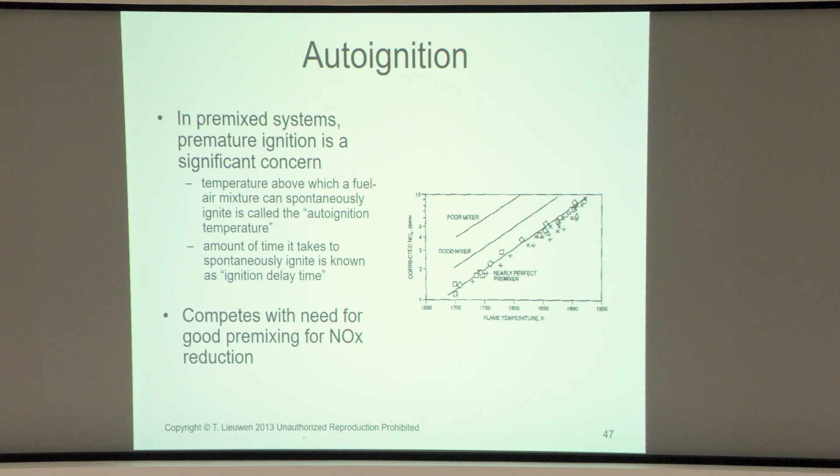All right, let's keep going here, just trying to wrap up this outlook discussion. I want to say a couple of quick things about autoignition, because that's also such an important driver for where combustion R&D problems meet the real world. Autoignition is just such an interesting challenge.

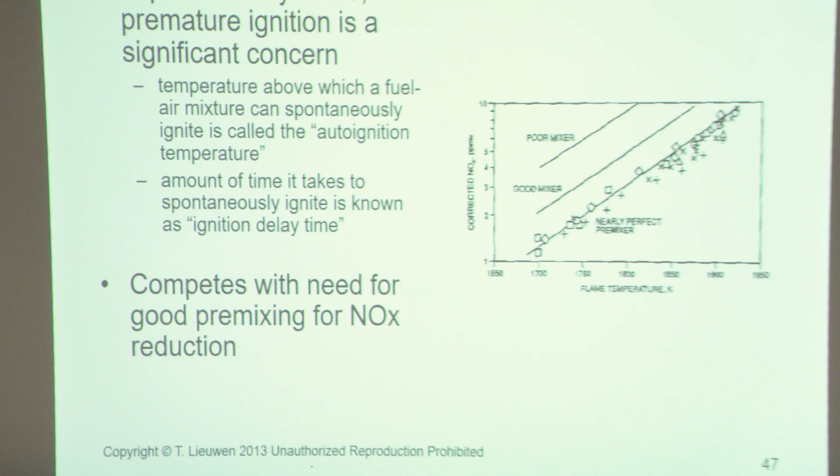If you're going to run premixed, premature ignition is a significant concern. As you can see from this plot I showed you earlier, if you want to drive down NOx, you want higher mixing. Better mixing means longer residence time, which makes systems more prone to autoignition. So you're always trying to trade off autoignition and NOx, particularly in higher pressure ratio machines.

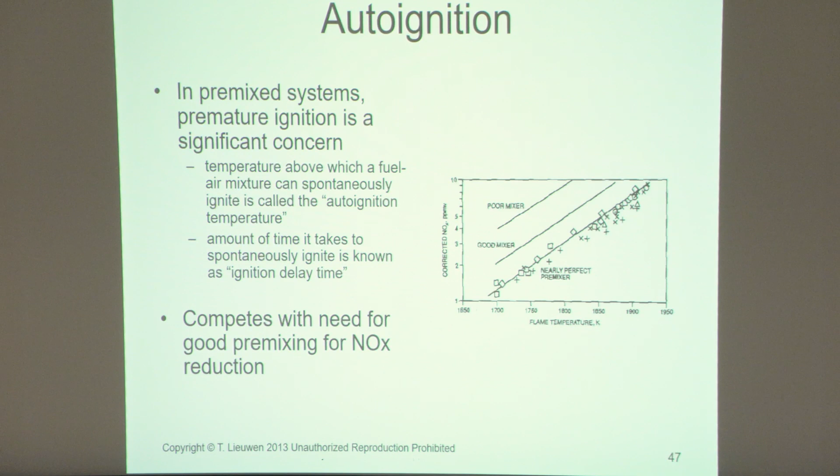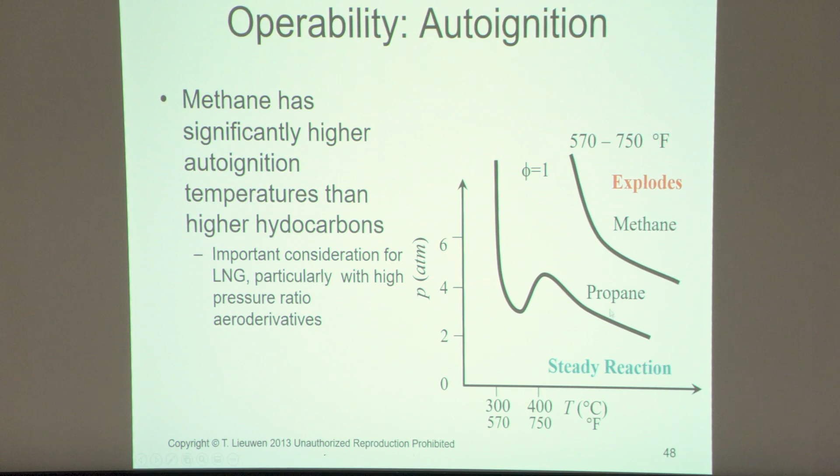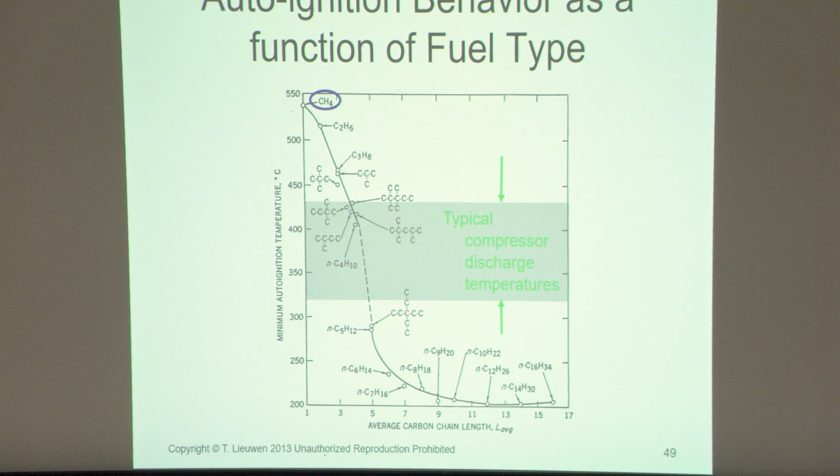This plot just further expands on this. This is a whole bunch of fuels, and this is sort of an ignition temperature, I think at 1 atmosphere - I can't remember. This is autoignition temperatures as a function of average carbon chain length. So the very top left is CH4, and then C2H6, C3H8.

You see that autoignition temperature dropping, and then you start looking at normal octane, normal decane, or normal dodecane. Temperatures are dropping, so it's getting easier and easier to ignite.

This is why for liquid-fueled systems - and obviously you're becoming a liquid as you move to the right as well - autoignition is such a hard problem. What you'd really like to do is what we call lean, pre-mixed, pre-vaporized: take your liquid fuel, vaporize it, and then pre-mix it. That takes time - more time than a gas because you've got to pre-vaporize it - but you actually have less time because the fuel auto-ignites so easily.

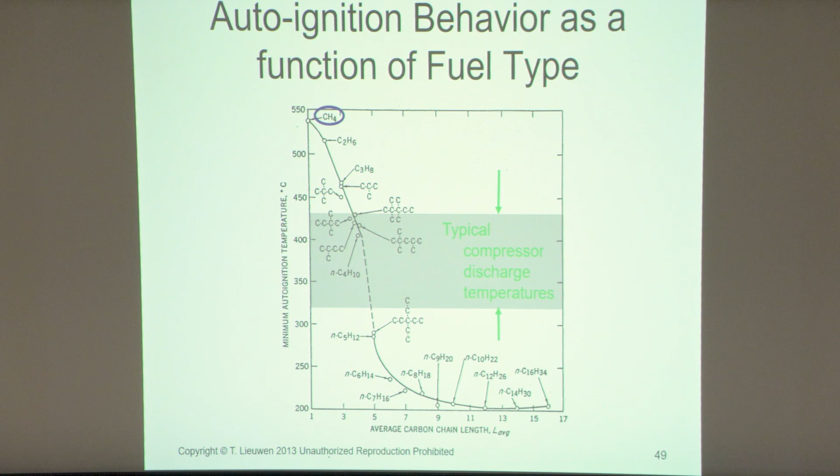This is why, if you look out there today, people are trying to get in that direction - like GE, some of General Electric's aerospace engines are trying to push in this direction - but those autoignition temperatures are just really low, and the temperatures and pressures in an aircraft engine are just so high.

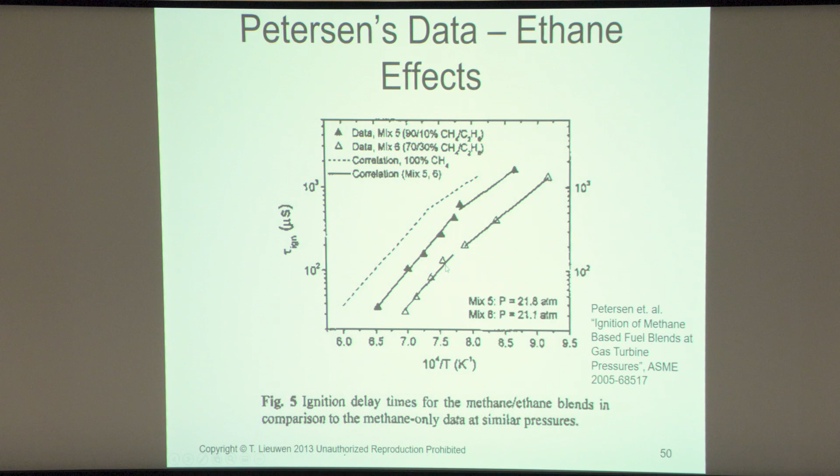Just to give you a ballpark, a conventional mixing time we might use would be a couple milliseconds to give it enough mixing. This would be pure methane, if you have 10% ethane, if you have 30% ethane. So this starts to become a real issue as you start blending stuff into your gas.

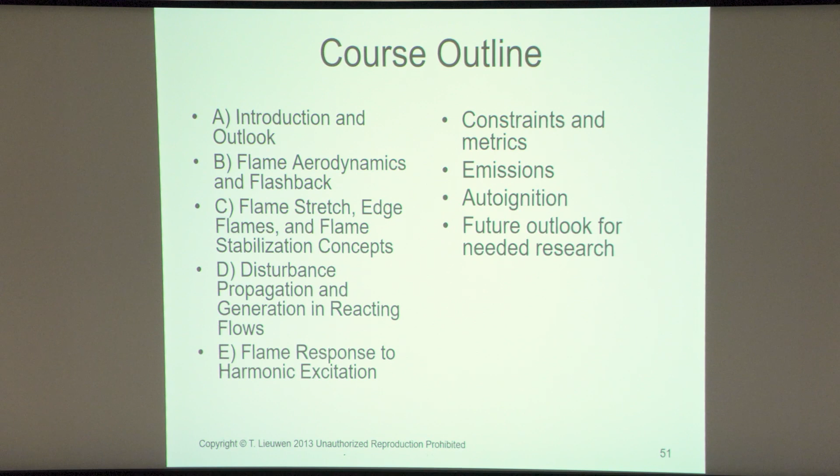So what I want to do now is shift a bit from the initial plan. I want to talk a little about where the world is going, what are some of our prospects, before I do a deep dive. Hope that's okay, because I feel like it might be useful context as you think about your future in combustion research.

What are combustion applications? Well, one big combustion application is natural fires. I'm not going to talk about natural fires, but that's really interesting stuff.

As you know, look at the air quality. I have two daughters living in the state of Michigan right now, and air quality from forest fires...

Canada. Another one is commercial space, that's really cool. What's happening in commercial space is really interesting. Everyone graduating from my lab now is going to work for commercial space companies in Seattle or California or Denver or Atlanta. Actually, we have a couple companies. Military applications, that's another one.

But I'm primarily going to talk here about civilian type, either power or propulsion type applications. And really, the 900-pound gorilla in the room is decarbonization, right? What does decarbonization mean, and what are those combustion challenges?

As I mentioned before, CO2 emissions are set by fuel, they're set by the cycle choice. That generally sets the overall conditions for the combustor. So what that means is increasingly we're going to go to higher pressures because efficiency is really important, because the higher efficiency, the lower the cost of the combustion-based solution. It means we're going to be looking at EGR type applications.

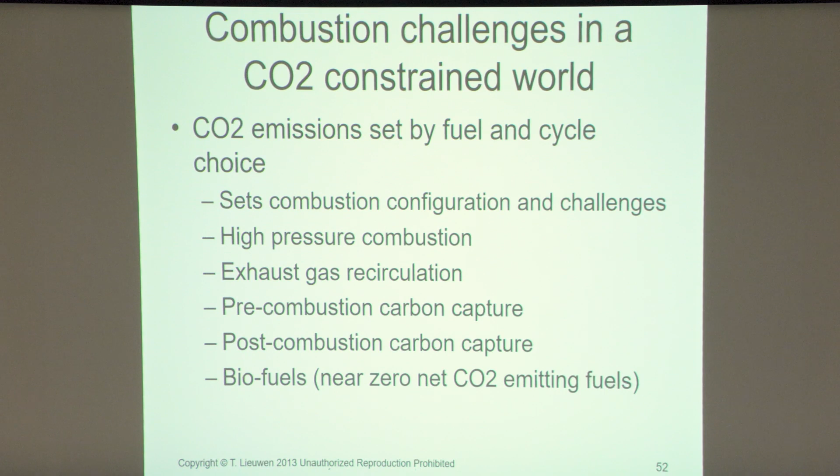If you want to do post-combustion carbon capture, you want a stream that's preferably composed primarily of carbon dioxide and water, you don't want all that nitrogen to have to deal with. And so that means there's a lot of people looking at oxy-combustion systems.

I don't know how many of you are familiar with what's called the Allam cycle. Okay, go take a look at it. It's kind of interesting, there's a lot of competing technologies, but the Allam cycle is basically trying to address the question of: let's suppose you wanted to design a power plant that was optimized from the beginning for carbon capture, rather than trying to bolt the carbon capture unit onto the back. How might one do that?

Really what it comes down to is you want to burn oxy-fuel, so you don't want all that nitrogen floating around. And then you start integrating the air separation, the oxygen generation system, with the power plant, with the CO2 stream. But what's really interesting about oxy-combustion is it's a little bit like rockets, except you're burning a lot more fuel.

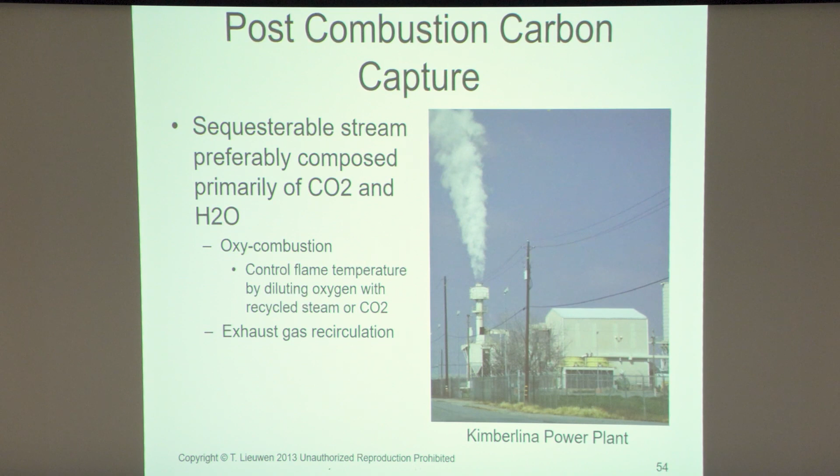Just like we only burn fuel lean in air-breathing systems because you'd never waste fuel, right? You never burn fuel rich. Only rockets burn fuel rich. But you don't want to waste fuel. In the same way, if you're paying for the oxygen, you don't want to waste oxygen. Which means you're going to want to burn dead smack, dead nuts, phi equals 1, and so forth.

And lots of really interesting combustion problems pop up when you start burning at phi equals 1, because phi equals 1 is actually kind of a crazy place to burn. If you think about it, if you're fuel lean, you've got lots of extra air floating around, and the fuel molecules just have to find a friend. If you're fuel rich, it's the other way around. If phi equals 1, there's only one, it's 1 for 1, right? You don't have anybody extra.

And so combustion chemistry gets a little bit crazy right around phi equals 1. Also, when we all learn combustion, we're used to thinking about equivalence ratio tendencies, which tend to be driven by temperature sensitivity. As you change equivalence ratio, you change temperature. So we think, oh, lean flames are colder, stoichiometric flames are hotter. Well, now when you're burning with these oxy systems, you're actually going to be decoupling stoichiometry from temperature. And it turns out a lot of things flip.

So for example, if I were to tell you I'm going to burn oxy systems and I want to sweep phi, and the way you sweep phi at constant temperature is you adjust the diluent ratio. And I wanted to plot flame speed as a function of equivalence ratio for an O2-CO2-methane system, just as an example.

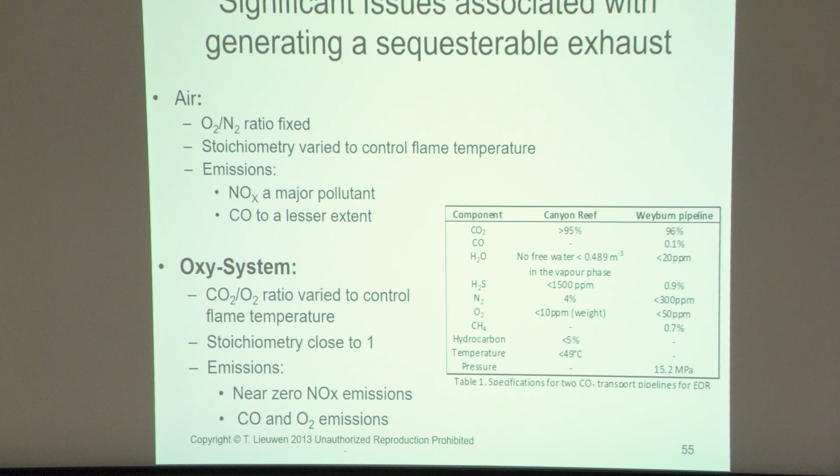And then other interesting things happen: if you have to generate a combustion exhaust stream that is sequestrable, or that you can put in a pipeline, you start changing your definition of pollutants. As an example here, I have a CO2 pipeline spec for EOR.

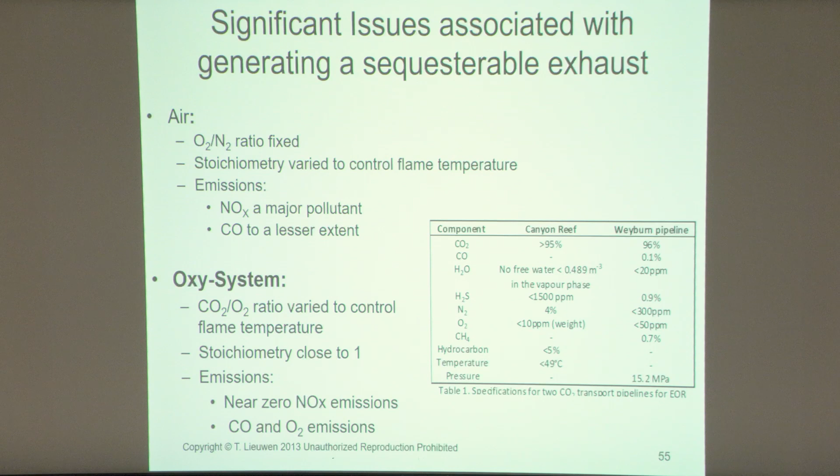EOR means enhanced oil recovery. This is where they actually built a carbon dioxide pipeline and use it to pump CO2 to get more oil out of the ground. Similar issues arise if you wanted to pump it underground.

And you'll notice the spec. Notice here, the Weyburn pipeline has a spec on CO. The reason it has a spec on CO is because the carbon monoxide can react with the metals in the pipe. Notice there's also a spec on oxygen.

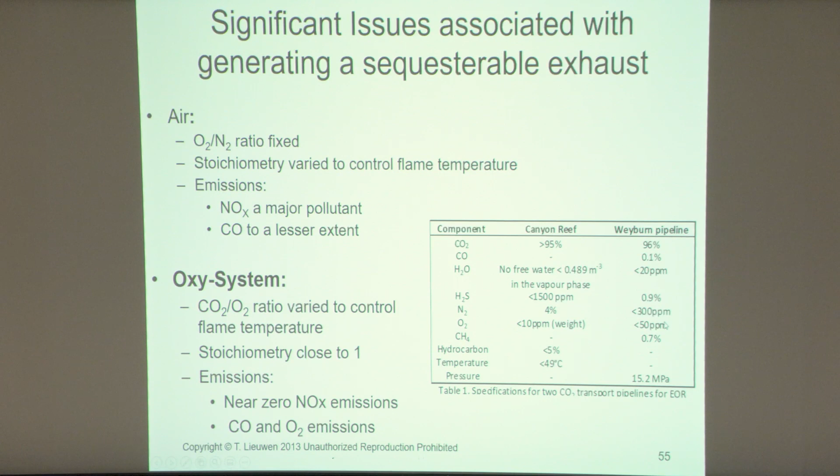So now oxygen, whether it's 10 ppm or 50 ppm, is kind of a 'pollutant' if you're putting oxygen into a reservoir or a pipe. Well, it's really hard to keep both CO and oxygen down at phi equals 1.

So the bottom line is: keep your head up as you're doing basic combustion science. Who would have ever thought about this combustion problem — how do I make a combustor that has almost no oxygen emissions, emitting 10 ppm or less O2? So pay attention to where technology is going, where policy is going, and that will suggest really interesting combustion problems you could sit in your lab and never think about.

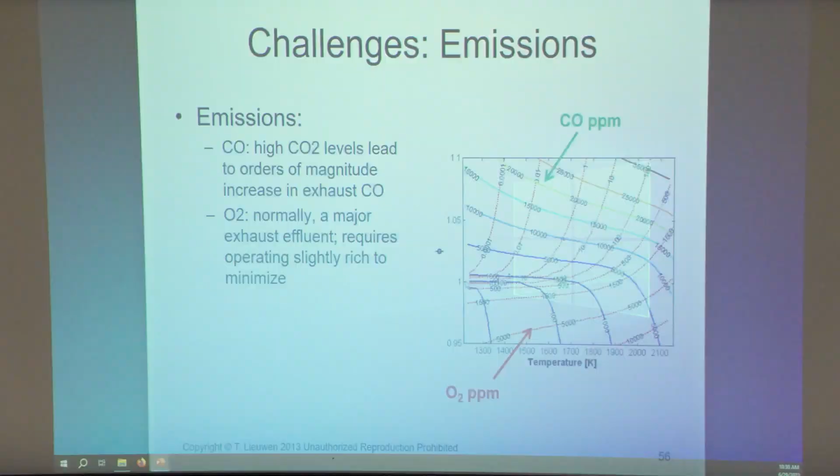All right, so I think I'm going to go off script now. Is Mike here? Hope he's okay with that.

Like I said, I'm going to actually be giving this talk. So what I just did was blast through some of the R&D problems, because I have this Gordon conference where I'll be giving a more complete discussion on that. So here, you're all going to be my guinea pigs.

For this sort of 50,000-foot view: the world's changing. Decarbonization, in the world of energy, the world of civil aviation and transport — decarbonization is totally driving the policy and funding landscape, and what's the role of combustion in this rapidly evolving sector? And then, what's driving combustion R&D in this new world?

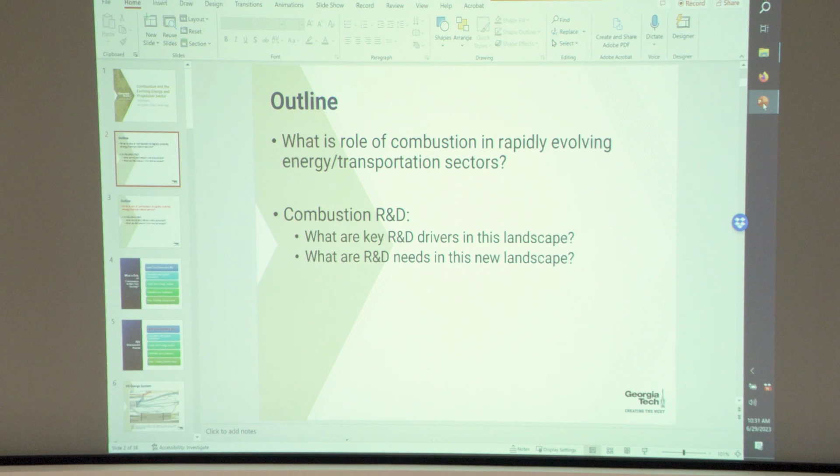So there will be a little bit of duplication here because I've made some references to it already, but I want to tackle this in a more systematic way. And then, what are the R&D needs in this new landscape?

Let's start by talking about combustion R&D. To have combustion R&D, you need to get your society to fund it, unless you're independently wealthy. You need some macro driver.

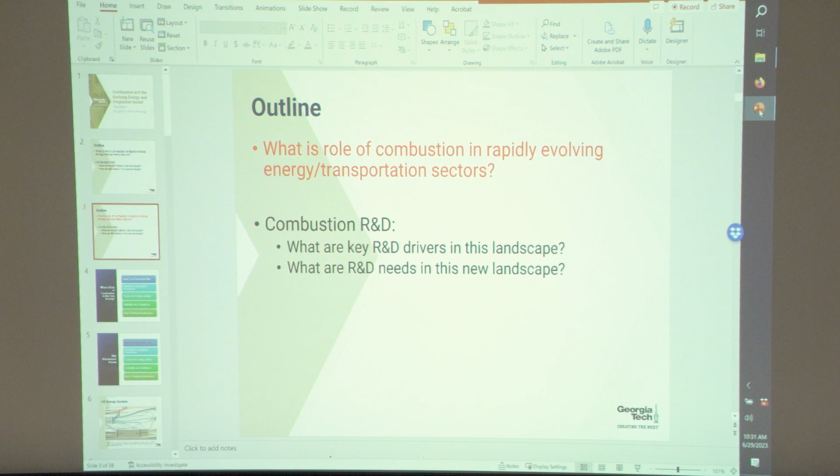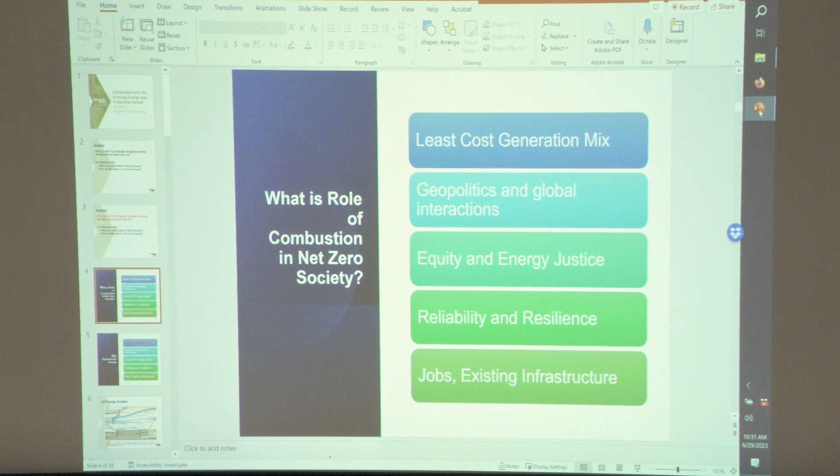So what is the role of combustion R&D? It's a complicated question. You've got to keep your head up in this new world and think about what's driving these conversations. These are the boxes of things driving combustion conversations today, and I'll briefly talk about each one. I think the first one is probably the one we're most comfortable with as engineers.

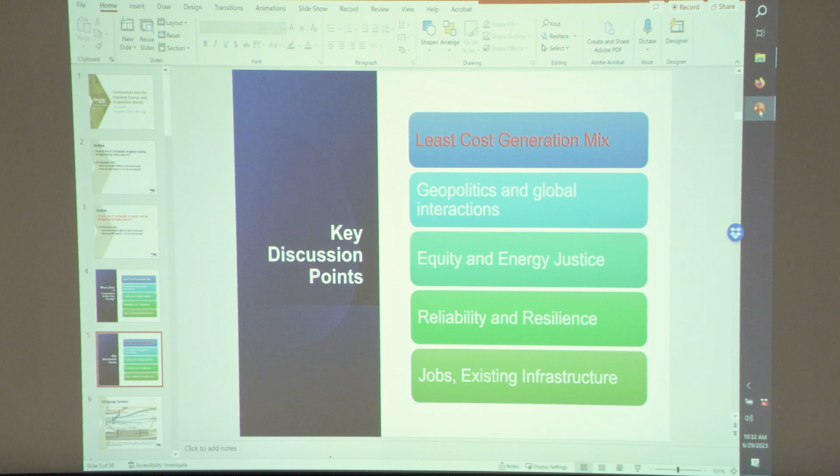That's the question of: let's assume we want to get to net zero CO2. What's the least cost way to do that? Let's imagine a society where we're starting - we can't blow the world up and start from zero, we have to start from what we have today. So how do we get from point A to point B in a least cost way? I'll spend some time talking about that.

Actually, let's go there first. We can start by just saying, what does the world look like today? I need to make this macro. You've all seen these Sankey diagrams.

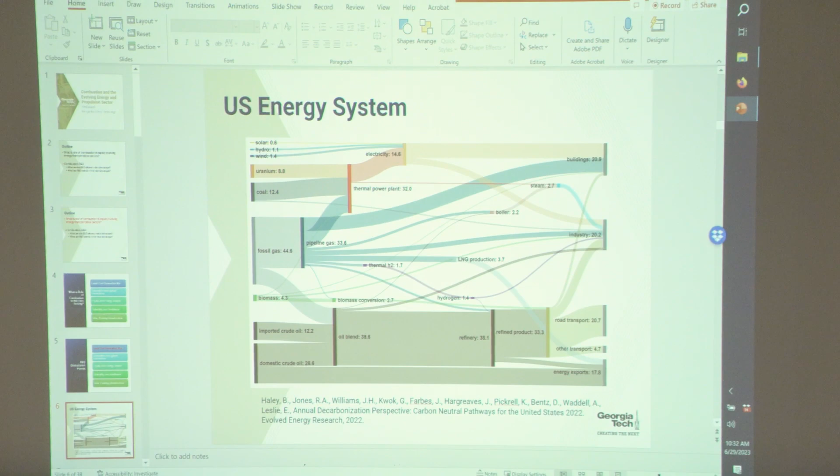What's on the left is our fuel sources, our energy sources today, and you can see fossil gas is a really, really big one. You see crude oil, coal, uranium, and wind, hydro, solar - tiny small boxes.

Over on the right-hand side, you see where that energy is being used. So the left is the sources, the right is the users of energy. You see buildings - buildings today are about 40% of electrical load, of overall energy load. You see industry - agriculture, metals making, aluminum, things like that. And on the bottom, the biggest CO2 emitter today in the United States is road transport - cars and trucks, things like that.

In the middle is: how do you go from where the energy is sourced to where it's consumed? You can think about this as the plumbing and wiring. Just like in your house - or your parents' house - you've got power lines outside and all the things that utilize that electric power inside, so you've got all this wiring. And you've got plumbing - a source of water outside. So how's it all connected? What's in the middle shows the plumbing and wiring.

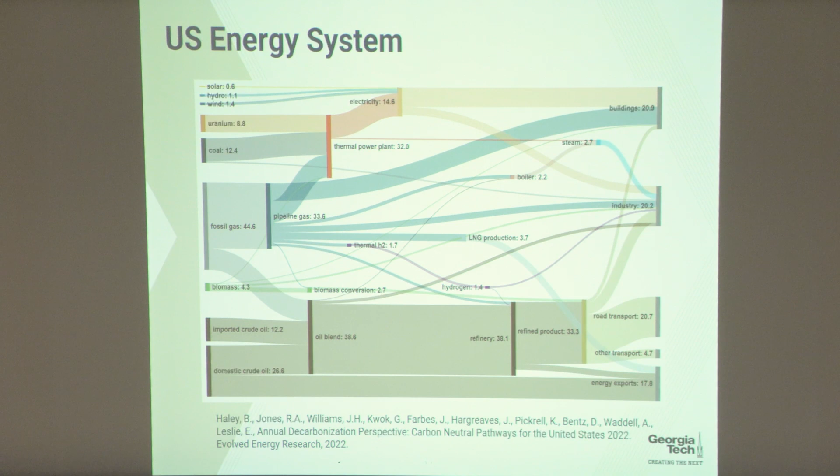One thing that pops up in the middle is electricity. Electricity is what we call an energy carrier - it's not a source of energy, but it's a very useful way of transporting energy from the source to the user. But you also see that a lot of these things direct-connect all the way from, particularly if it's a fuel, the left to the right. So a nice way to deconstruct that system is to say there's really three things going on in that picture.

We've got these energy sources on the left, which are largely non-dispatchable renewables, nuclear, and fossil. On the right we've got these users - basically industry, transportation, and buildings. But don't forget in the middle there's a lot going on - we've got all these ways of storing and carrying energy. Someone already referred to the electricity storage issue, but don't underestimate how important that is.

Think about how dependent we are today on electricity, which is basically a just-in-time business. Just think, if I dim those lights, there's actually a power plant the grid is adjusting - a power plant that's adjusting its power output. So within a fraction of a second, the supply and demand of electricity are balancing each other. Basically what happens is the grid frequency changes just a little bit, and that acts as a signal to the power producing sources. Think about what other major commodity our society is based on that's just-in-time. Like, I don't know, bread.

Bread comes from wheat. Imagine a world where your consumption of wheat was exactly balanced by the production of wheat.

Take strawberries, or any commodity, or cotton for your shirt. We're used to a world where things can get stored and made over here. But electricity, we don't really store it, although we're trying to ramp that up. And it's really hard to move. Ukraine makes a lot of grain, and it's shipped all over the world, or the US makes a lot of grain, or cotton's grown in Australia. So we have these global ecosystems.

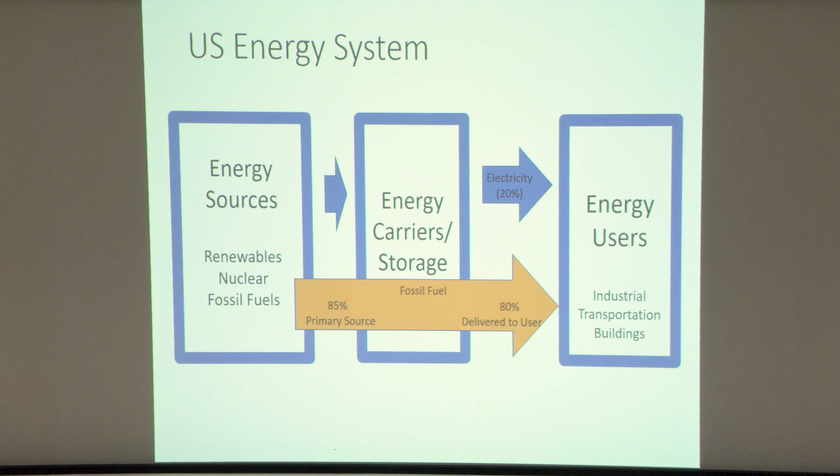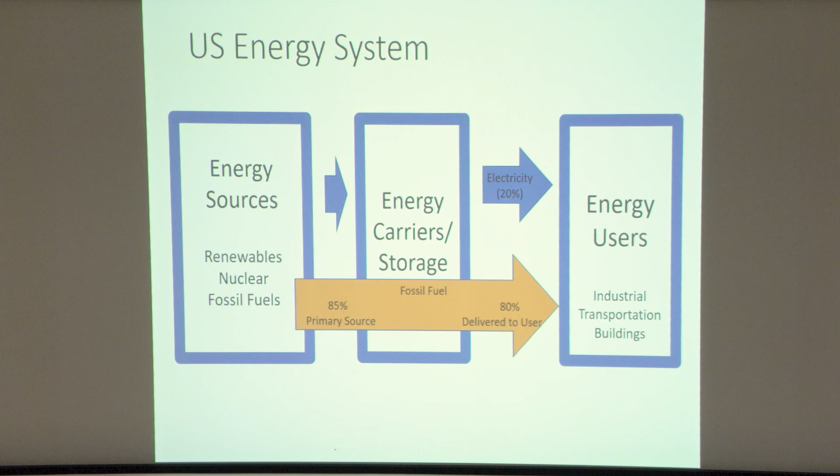So what's going on in the world today? This is the US. Electricity moves about 20% of the primary energy as a carrier, and the balance is actually fossil fuels. So fossil fuels act as about 85% of our primary energy sources today in the US. The reason that 85% is different from the 80 is just system efficiencies and things like that. But in terms of what the user's taking in, like your car, the fuel is both the energy source but also the means of moving the energy to your device, about 80%.

A major point here is that as we think about the world we're heading into, it's easy to think fuels are just energy sources. Well, actually, no, fuels are a lot more than energy sources. They provide three sources of value: they're an energy source, they're an energy carrier, they're an energy storage medium. If you think about where the world is going, today we already differentiate between these two because we have two energy carriers, electricity and fuels. Increasingly, these three value propositions are going to get differentiated. They're going to be separately monetized. They're going to be in different technologies, and systems are going to compete for utilizing that.

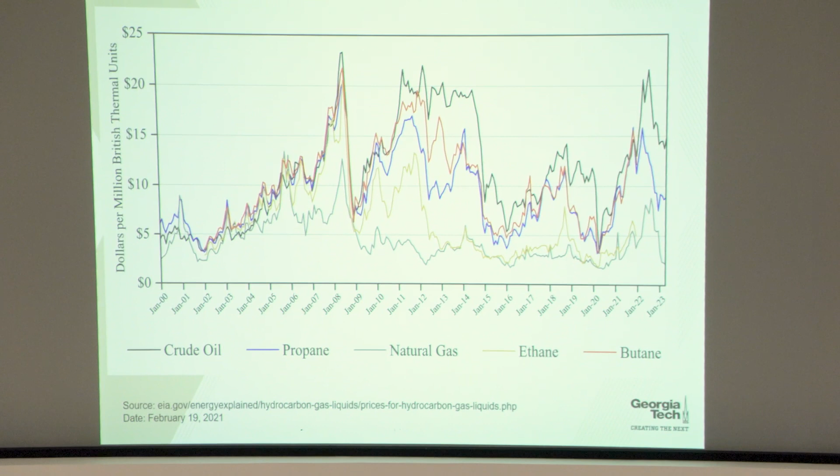Okay, then right around, I don't know, what do you see, 2009, 2010, ethane peels off. Anybody know what's going on there?

Well, and so just real quick, for those of you who are not aware of this, today ethane is used, it can be burned, but it's also used for making plastics, like ethylene.

But what happened was a lot of the natural gas that was coming out of, let's say Pennsylvania, is what we call wet gas. It has lots of ethane and propane in it. And so all of a sudden our petrochem sector's ability to utilize that ethane to make plastics and chemicals, which is a higher value use, became saturated. They didn't need it anymore. So they said, well, we'll just inject it in the pipeline.

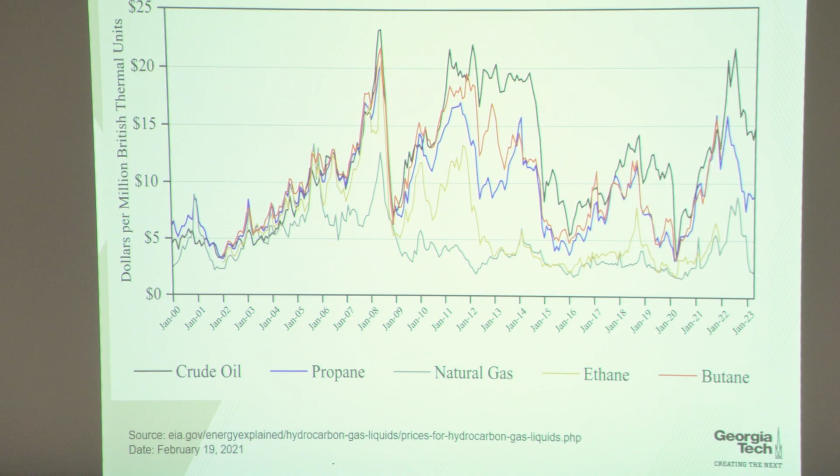Okay, all right, well let's flash forward to where we are today. And basically, where we are today is you see things bouncing around a little bit, but notice there's basically two buckets. We've got one bucket is ethane and natural gas, and the other bucket is propane, crude oil, and butane.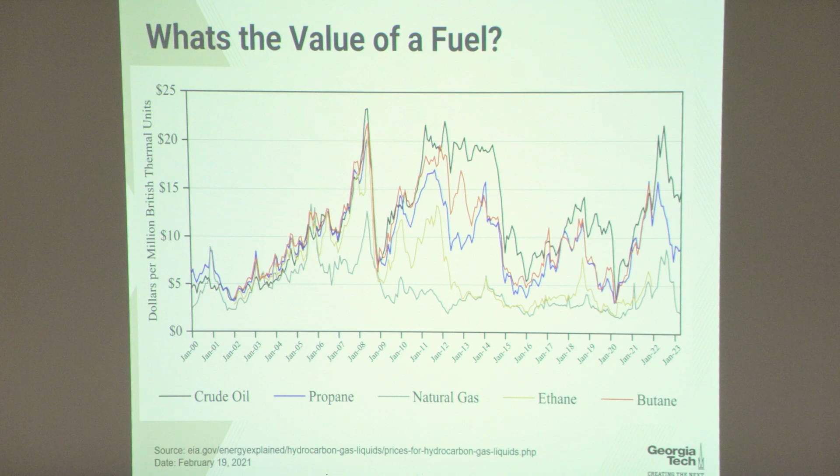So this is what the market is saying. On an energy basis, the market's saying, if you're butane, propane, or crude, I'm going to give you this much for a given amount of energy. If you're ethane and natural gas, I'm going to give you that much for energy. So again, if we think about those three value propositions, source of energy, carrier of energy, anybody have any idea what's going on here? There's physics here.

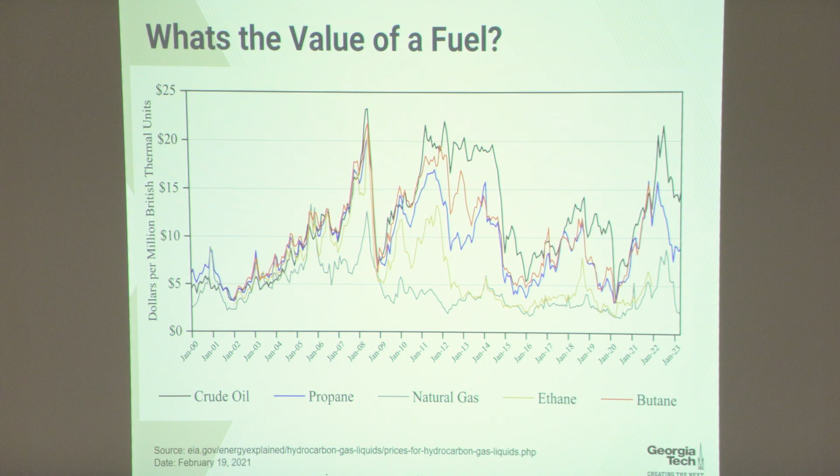Let's think about dew point. Well, all right, so standard temperature and pressure. What do you know about crude oil? It's a liquid. What's natural gas? It's a gas. And just basic physics 101, it's just a lot harder to move a gas, right? If you want to compress it, remember the compression loss. If you want to compress a liquid, it's pretty easy.

It doesn't take much power to compress a liquid. If you want to compress a gas, it has this nasty tendency to heat up instead of just compressing. It's a lot less efficient. You have to chill it. And ethane is actually basically a gas as well, whereas propane is pretty close to a liquid.

So essentially what you have is the market says, if you're a liquid, I'm going to give you this price for the unit of energy. If you're a gas, I'm going to give you this price for a unit of energy. So you can clearly see this differentiation of value based upon whether you're a gas or a liquid that the market provides. So certainly it's a source of energy, and you can see what it's paying purely for the source of energy.

The other thing that's happening here, the reason you see this segregation, is somewhat unique to the US, because natural gas prices in the US are so cheap, like $2 to $3 per million BTU. If you're in Korea or Japan, you're paying $20, ten times as much. So there's this monster arbitrage between what's happening in the US and the rest of the world. And if you're just in the US, you don't necessarily appreciate how cheap energy is here.

Whereas with liquid fuels, what you pay at the pump for gasoline in the US is really not that different from anywhere else in the world. And why is that? It's because if you happen to be the person who owns that gas and you can get paid more for it in Europe, you're going to put it on a tanker and send it to Europe, because it costs almost nothing to ship it there. It costs about $1 a barrel.

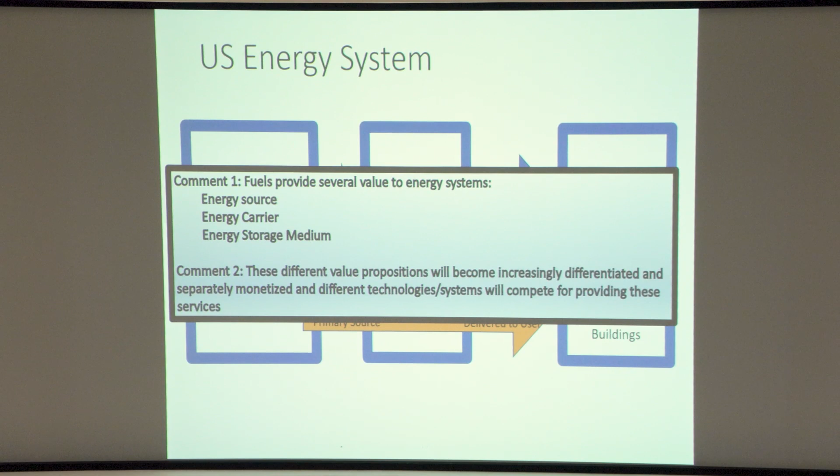But anyway, bringing me back to the point I was going to make: when we think about the role of fuels in the world we're heading to, just remember fuels are not just energy sources. You can clearly see their value in terms of energy carriers and energy storage mediums.

All right, so what would a net zero CO2 system look like? This is the million-dollar question, but there's actually a whole community working on this. It's a really interesting community. Professor Jesse Jenkins here at Princeton is a real leader in this area, doing what we call macro energy systems modeling, where you put together a model of the overall energy system. What makes these models tricky is you can't just think about an average United States.

You have to break this out by geography, by region. You can't just average over a year. The grid's got to work every second, right? We get impatient when our power goes out. So if on average it works, that doesn't matter, it needs to work at every instant. So you basically put these models together, somewhat like CFD, where you chunk the country up into blocks and then break it out by time.

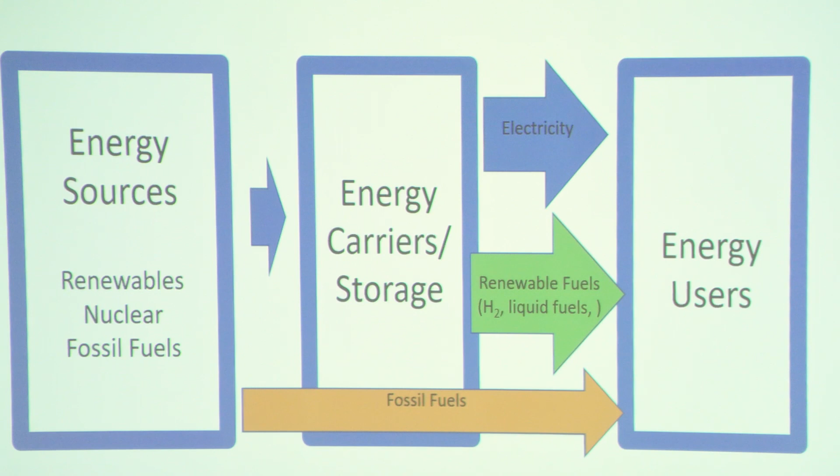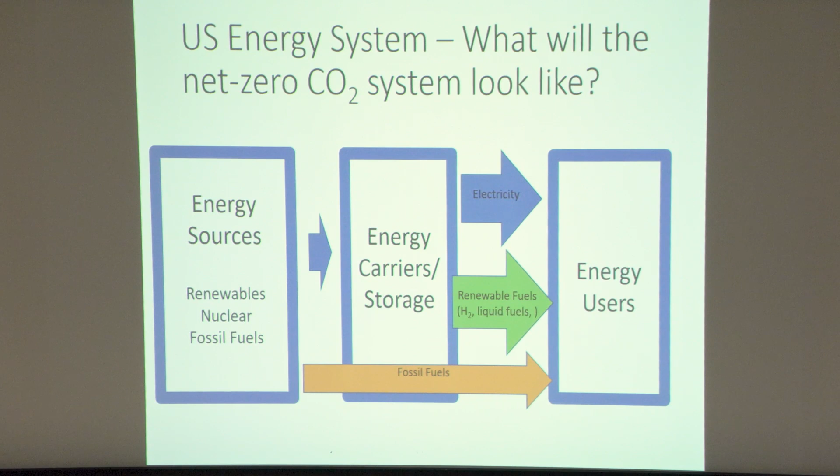And then you wrap an optimizer around it and say, okay, get me to net zero, what's the least cost way to get there? And basically what pops out is this new sector of energy carriers. So today, electricity is not a source of energy, but a carrier of energy. What these models want to do is say, not only do I want electricity, I also want fuels in the mix, but fuels that are not naturally produced from fossils, that are instead manufactured via biological means or some sort of catalytic process. That could be hydrogen, a liquid fuel, or something else.

That's one part. The other part, which you'll learn about this afternoon, is fossil fuels still in the mix, but with carbon capture, could be pre-combustion capture or post-combustion capture. So what does that world look like? This is a picture of what that world might look like. I showed you the simple version before, this is the more complicated version.

If you look on the left, here are your sources of energy. What's different? Well, you still have gas, but it's fossil gas, and it's smaller. You still have crude oil, it's there, but smaller. Solar gets really big, remember solar is non-dispatchable. Wind gets really big too, also non-dispatchable. Nuclear is still there, and biomass gets much bigger.

Then on the right, we have all these users of energy. But notice that all the plumbing and wiring just gets a whole lot squirrelier. You don't have a small number of big blocks, you've got lots of little blocks going around. You still have electricity, but then you've got hydrogen, and in addition to hydrogen, essentially these different liquid fuels. You've got ammonia, and so forth.

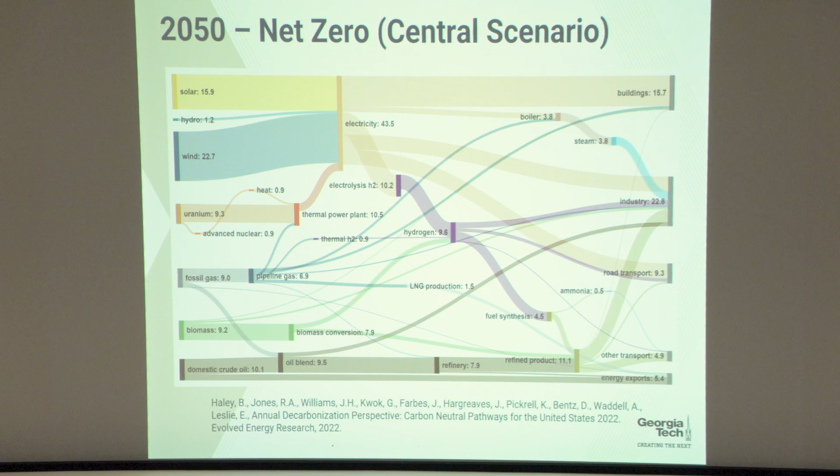If you break this thing out and say, let's just think about big blocks, what does this look like? This is where the numbers are: electricity as an energy carrier becomes much more important than it is today. So today, about 20% of the power, the way energy is delivered to users, is via electricity. That goes up to about 50%. The reason for this is transportation, as we electrify transportation, that's why that number goes up.

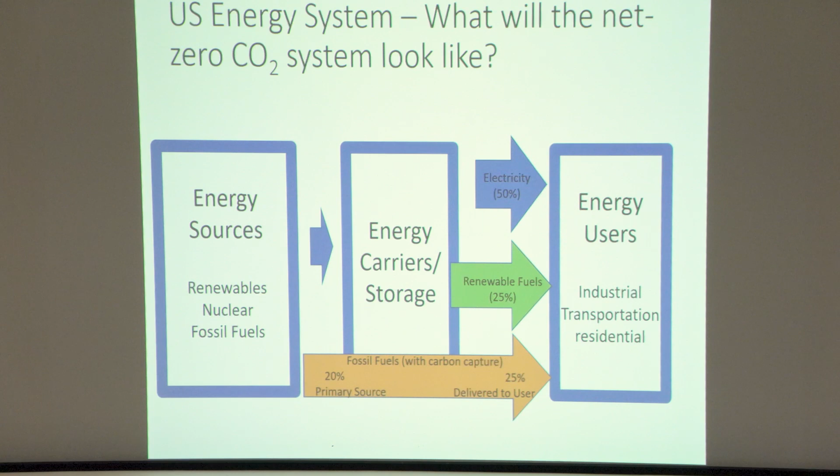But note that number is not 100%. There's a lot of misinformed people in the popular press who envision a world where everything goes electric. Well, a lot more goes electric, but it's 50%. Where does the other 50% come from? It's all fuels, right? This is where you get this huge new sector that really doesn't exist today, which is renewable fuels. This is where this fuel flexibility piece comes from. This is ammonia, this is SAF, this is hydrogen. Frankly, a really interesting macro question for our society is, what is the best chemical energy carrier today?

We've got a century of experience using naturally produced fossil fuels, but if we could design or make our own fuel, what should it look like? There's really two questions here, and this is where it gets thorny: there's the cost of producing the fuel, and the cost associated with the infrastructure that has to handle the fuel and the devices and machines that utilize it. So what's the cheapest fuel to produce?

Probably hydrogen. Simple, don't need any... what's the problem with hydrogen? If we were to blow society up and start from scratch, maybe it would be all hydrogen. What's the problem with that?

Well, hydrogen is really hard to move. You've got to get it cryogenic. You get hydrogen embrittlement, so you can't use steel pipes—it'll make your pipes brittle. If any of you are running hydrogen, you'll notice how your regulators and control valves have to be replaced more often because hydrogen attacks the steel in them, etcetera.

Or take what's happening today in the aircraft industry: there's this big controversy about what's the optimum path—do we use drop-in or non-drop-in fuel? How many of you know that phrase? Drop-in means, can I take a fuel and make it look and act just like fossil fuels do today? That way I don't have to change out any jet engines. I can use the same engines, the same logistics infrastructure, all that stuff.

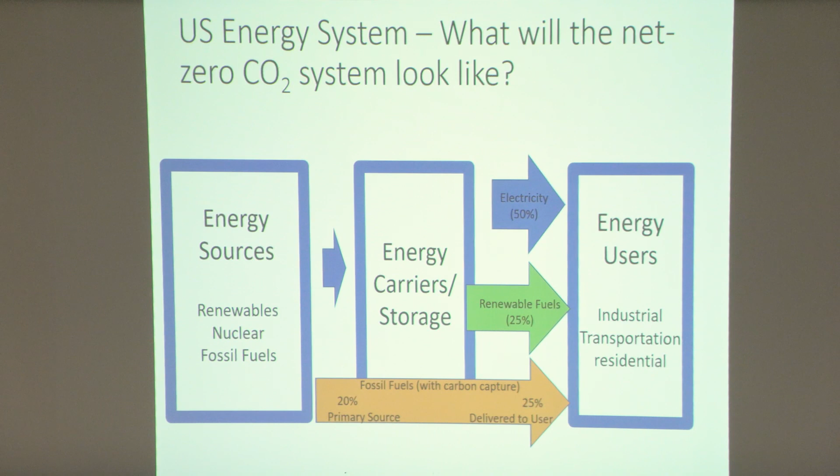So I think the major point here is that there's a lot of fuels showing up here, and not all these fuels will be converted into useful power via combustion. Some will use fuel cells, but a lot of them will still use combustion.

So that kind of gives you a feel—if engineers were in charge of the world, and this was a centrally planned economy, this might be what our world looks like. But in reality, democracy is just so much more interesting and lively, because politicians don't care what engineers think at the end of the day. There's a ton of other things thrown into the mix, like geopolitics, equity and energy justice, reliability, jobs, and existing infrastructure.

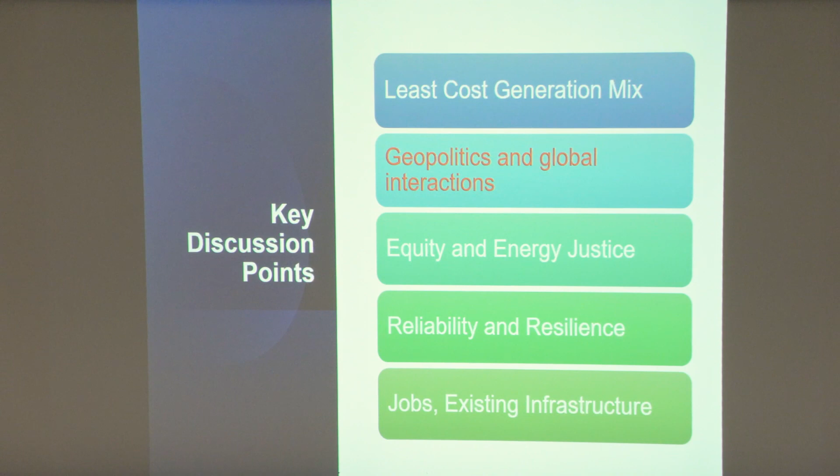A simple example: take Europe, take the US—there are towns, people's jobs, and livelihoods built around an existing system. So let's go back to that question of what's the optimum energy carrier for the future—drop-in versus non-drop-in. As soon as you move away from drop-in to non-drop-in, guess what you're doing? You're disrupting that system, and the moment you disrupt it, politics enters. Because you can say, I'm cool, I want to address climate change, but just don't make me lose my job and my house. The moment that happens, politics enters.

And so if you say, Tim, what's your opinion? Drop-in is going to be the rule of the day, just because politics is such a powerful force.

And because drop-in means that you can roughly keep where people live today, where their jobs are - that can remain.

The other thing that's really important - and there's a lot of interesting problems here. In fact, Professor Michelson and I were chatting about this at breakfast - is the whole equity and energy justice issue. The idea that as we transition our energy systems, we want everyone to benefit.

Energy is a wonderful enabler of our quality of life, but our energy systems, whether it's our power plants or our automobiles, are also responsible for a lot of negative health impacts. One of the biggest drivers of negative health effects, whether it's asthma or lung cancer, comes from combustion-derived pollutants. So there's a lot of interest today in people saying, look, we don't want a society where the poorest 10% of people get hosed and bear the burden of a low-cost energy system. We want a society where everybody is flourishing and benefiting, which seems eminently reasonable.

But what that means is - I showed you this picture, and this is the least-cost way to get to net-zero CO2, right? I didn't talk about air quality and pollutants.

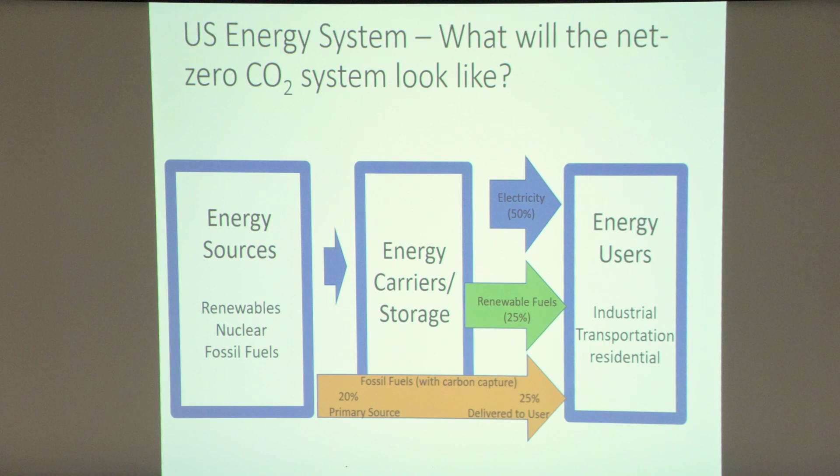So there's intense interest today in the policy world. You'll see a lot of environmental groups say, oh, that makes me really nervous - what about NOx? What about soot? What about particulates? Can't we just bump this number up? We know that this doesn't address that as much. And so that's driving a lot of interest.

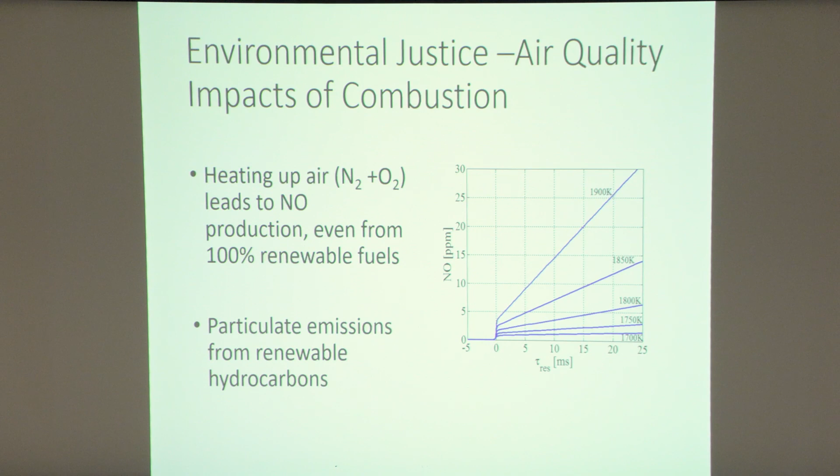Let's see, where do I have it? I'll just show you, just as an example. Well, actually, I'll come back to it.

Okay, so anyway, that gives you a view of where I think the world is probably heading. There's going to be a lot of combustion in this world, but increasingly the role of combustion is going to utilize a different set of fuels, where combustion is really around managing energy carriers, dispatchable power, and things like that.

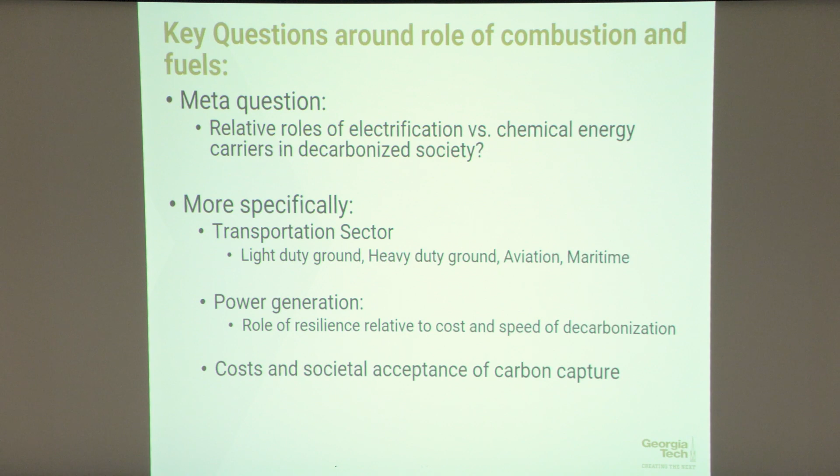Okay, well, with that background, what are the key R&D drivers in this landscape? I think there's going to be four. So for those of you anticipating a future in combustion, at no charge at all, I'm giving you my cliff notes on where I think the future of combustion R&D is. I think it's these four bullets: efficiency, operational flexibility, pollutant emissions, and fuel flexibility. In some sense this is obvious, but in some sense it's not.

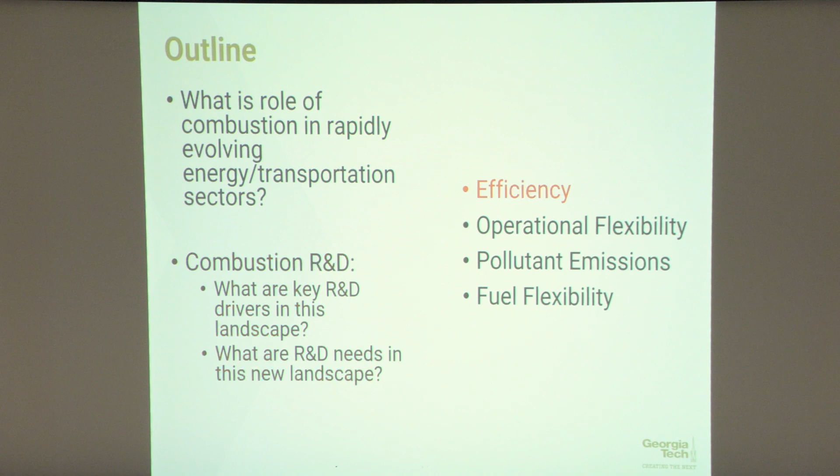So let's start with efficiency. I'll talk about two parts. One is, as we talked about, the efficiency of a thermal power plant - the Brayton cycle goes up with pressure ratio. So think about all those interesting combustion problems that happen as you go to higher pressure ratio. I think in particular there's really understanding the bifurcations - okay, what can I understand by doing something at atmospheric pressure, versus what do I really have to do at pressure to understand? There's a lot of problems where simply the fundamental physics changes.

A simple example is NOx. As I mentioned before, at atmospheric pressure combustion, in most applications the NOx formed in the flame is the dominant mechanism. In high pressure combustion, the dominant mechanism is post-flame. Fundamentally different scaling, fundamentally different sensitivities. So that's one example.

There's lots of other ones. When we talk about flame stabilization, it turns out that where flames can sit is profoundly sensitive to pressure, because flame thickness is really important. Flame thickness basically goes as 1 over pressure. So the difference in thickness between a 1-bar flame and a 20-bar flame is that the 20-bar flame is 20 times thinner, so it can park itself in regions a 1-bar flame could never exist in.

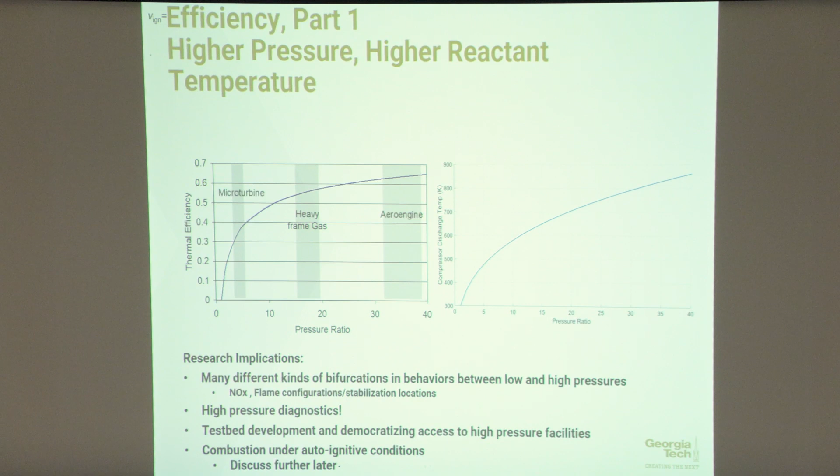But as you go up in preheat temperature, that famous combustion S-curve flattens out, and effectively you're going to lower activation energy, and you lose phenomena like ignition and extinction—it becomes more of a reactor-type physics.

One simple example: deflagrative, premixed combustion is a reactive-diffusive wave—an intricate coupling between reaction and diffusion. In a world with higher reactant temperatures, where combustion happens via autoignition alone without diffusion, you get fundamentally different scalings and different sensitivities to turbulence and things like that. I'll say more about that later.

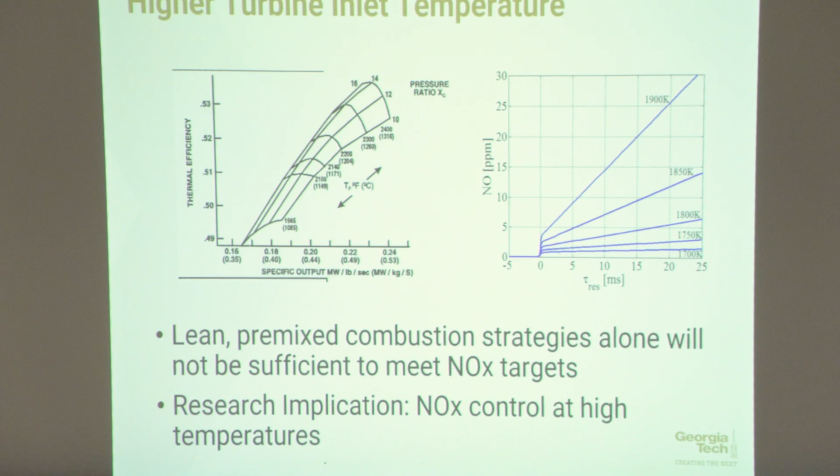Okay, that's part one on efficiency. And remember, efficiency is cost—combustion is going to be competing with lots of other technologies, like fuel cells. The lower the cost, the more competitive it is.

So I talked about higher pressure, but the other part around efficiency is higher turbine inlet temperature. I showed you this slide earlier, this image on the left—remember that for a combined cycle power plant, you want higher turbine inlet temperature.

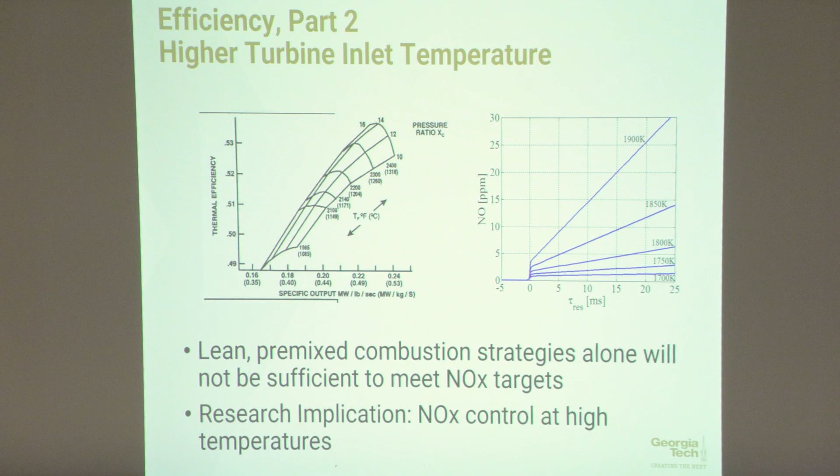And the turbine inlet temperatures today are at the point where even perfect premixing makes way too much NOx. So lean premixed combustion strategies, which is what the combustion community has focused on—you'll see hundreds and thousands of papers in the literature on this topic, motivated by low NOx—it's not sufficient alone. So how do you do NOx control at high temperatures?

Well, probably the solution is shown right here: axially staged combustion. I showed you this before—most of the fuel comes on the front end, and if 1800 K is your magic number you want to keep the flame temperature below, you keep it below that, then dump the remaining fuel downstream—it could be pure fuel, or a premixed mixture, or whatever.

The theoretical benefits of this are large. We did a study on this a few years ago where we said, let's forget about real-world mixing rate effects, and just ask: if we could mix instantaneously fast, what's the best possible NOx numbers you could get without violating any laws of physics? In other words, what's the foundational floor we could push this technology to?

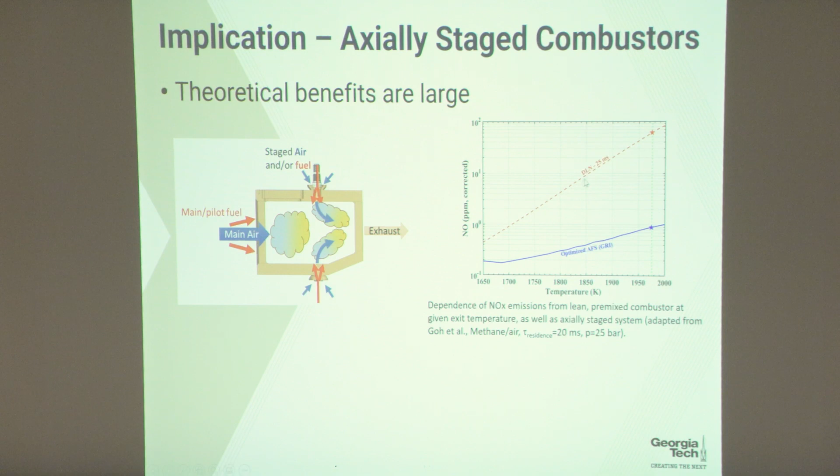So this is a plot for a 25-bar combustion system, 25 millisecond residence time, versus temperature. This is NO in ppm—this is DLN combustion, dry low NOx combustion systems. This is a log plot of NO, and you can see it rise exponentially.

For reference, EPA limits on NOx today are 30 ppm, but many cities require 9 ppm—Southern California, it's 3 ppm. That gives you a feeling for what the regulations are today: 3 ppm is right here, 9 ppm is right there, 30 ppm is right there.

You can see DLN, perfectly optimized, will get you there until you get to about 1920, 1930 Kelvin turbine inlet temperature. But our friends who make turbines have now developed technologies that get you above that temperature. So then what do you do? Then you can't meet compliance.

But now if you say, all right, if we were to optimize one of these things, the whole curve just drops by an order of magnitude and the temperature sensitivity drops. So this is what's fundamentally achievable. That delta between the orange and the blue, that's a career in research right there, is how do you get there?

Obviously, as you might expect, real systems are starting to be commercialized by the big manufacturers. But I can tell you they're not sitting anywhere close to that blue line. So how do you get there? There's a ton of really interesting combustion problems buried in there.

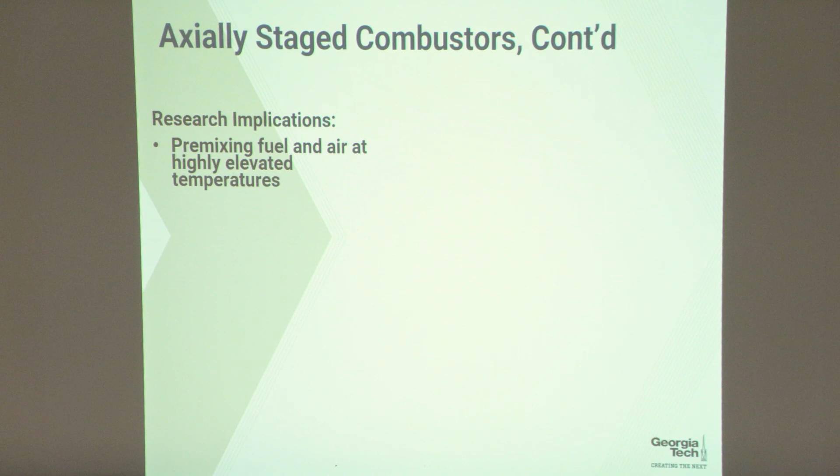So for example, I've got a couple problems here, you've got to premix that fuel in the air. One challenge with this type of approach is that you're premixing—I talked about the challenges with autoignition already. You've got fuel and you're dumping it into air of 800-900 Kelvin. That's hard. If you want to start dumping fuel into combustion products, now you're at 1800 Kelvin. But it's got to be mixed. In order to get to that blue line, you've got to premix. So how do you dump fuel and premix it with an 1800 Kelvin crossflow?

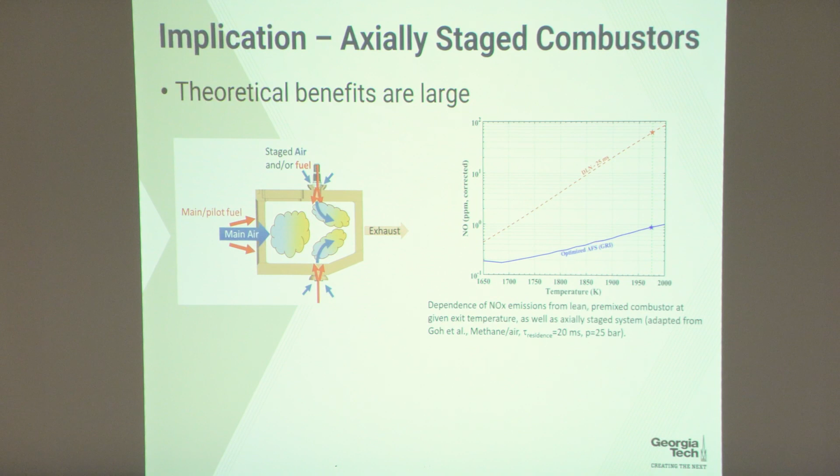The good news is it's not just air—there's also oxygen, nitrogen, CO2, and water. But how do you do that? That's a really interesting challenge. So premixing fuel and air at elevated temperatures is a big problem, a big opportunity.

And here I have a plot just to illustrate this. This is OH—the orange is OH PLIF, the blue is PIV particles. What we're doing is dumping fuel, here, this is what we'd call a reacting jet in crossflow, so we're dumping fuel into hot combustion products there. So hot combustion products, pure fuel.

Anybody want to speculate on what the NOx production from this flame might be? Lousy, really bad. Why? I'm going to make a lot of NOx. This is not an optimized configuration. This is not the blue line. Pure fuel,

oxidizer. What kind of flame is that? That's a non-premixed flame, right? That flame—where's the premix? If I'm dumping in fuel, there's no premixing happening there.

So you've got a couple options to make this thing work. Either you've got to premix that fuel that's coming in some way, but you also have to push that flame downstream. That flame is anchored right at the nozzle outlet, and you want to say, don't anchor, please—move downstream so that you can get some premixing of fuel and air. And by the way, if you want to push it down, what you want to do is crank up the velocity of that fuel.

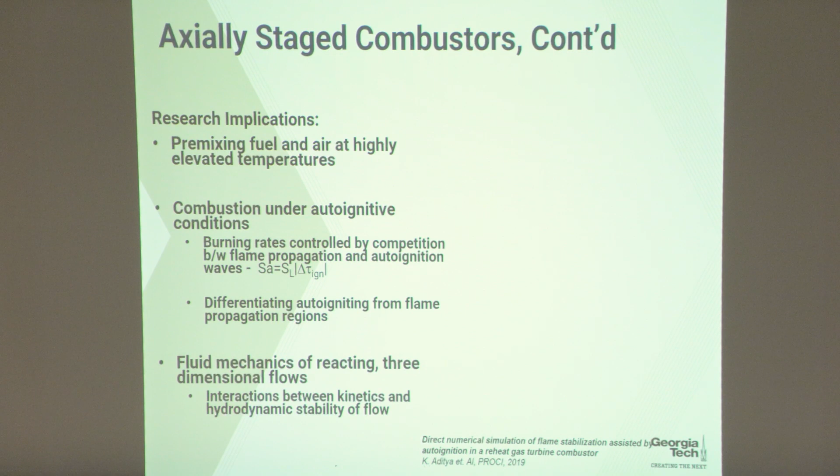The last one I would just highlight is, in fact, but I better stop highlighting problems because I'm going to totally crush my schedule here. Okay, so those are just some really interesting problems that I see emerging in the future around efficiency.

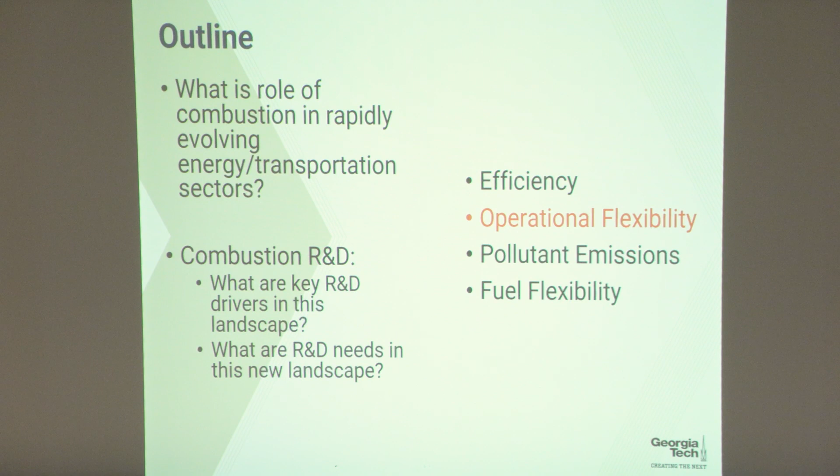Let me give you a simple example. Suppose that you have a combustion system and you're running it at high power settings and it's really hot. The walls are really hot, but you have really high velocity so the flame doesn't flash back. And then you ramp down the power to another condition maybe where you decrease the velocity, but you also reduce the fuel air ratio.

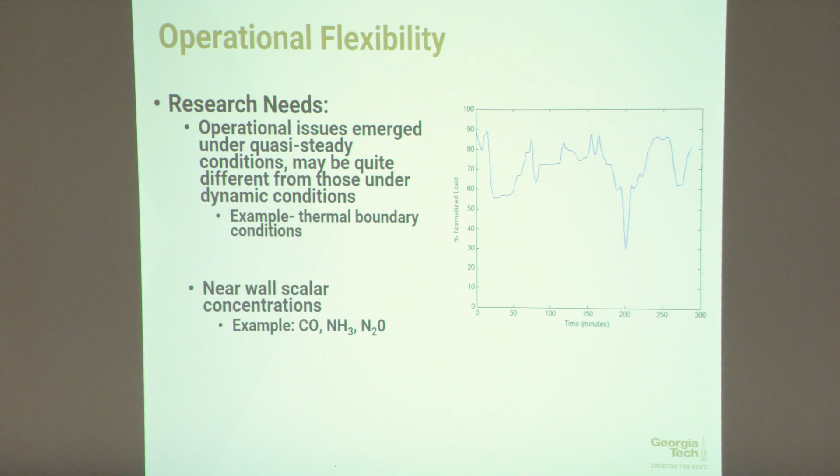So under steady state conditions, the flame may not flash back. But under those dynamic conditions, what you could be doing is you could have really hot combustor walls because you've got this thermal structure. So the thermal boundary conditions that this flame is interacting with, in terms of where it's stabilizing, how it's flashing back, could be very different under quasi-steady conditions. So that can give you fundamentally different effects.

And I'll give you an example of this: a major aircraft engine manufacturer had an issue a few years ago as they were certifying a new engine where they had a significant combustion instability when going through a transient. It was not an issue, let's say, going from 60 to 50% power. I'm just going to make something up. 50% power, super stable. 60% power, super stable. But if I go, bam, from 50 to 60, monster combustion instability.

And essentially it's due to this fact: the combustion system has these different time constants, and the thing can really be out of equilibrium.

So that's another interesting combustion problem, around the fact that thermal systems will increasingly be interacting with a lot of non-dispatchable resources, and the world is going to be a whole lot more dynamic. New combustion problems. Okay, pollutant emissions.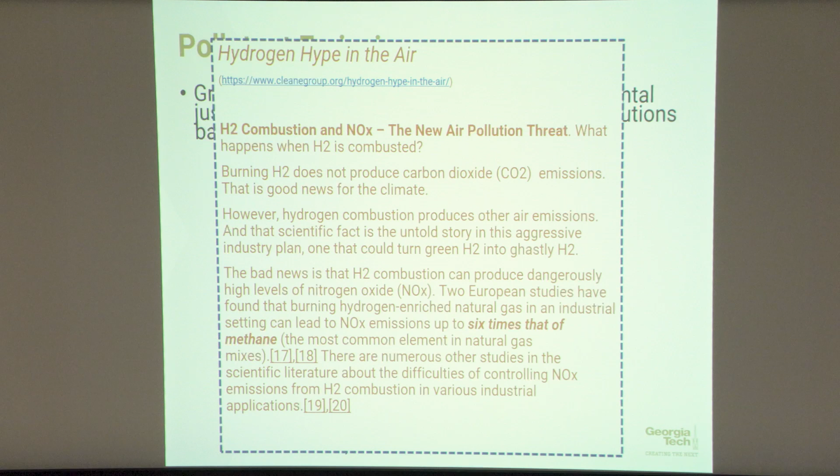This is called Hydrogen Combustion and NOx, the new air pollution threat. What happens when hydrogen is combusted? Burning hydrogen does not produce carbon dioxide emissions. That's the good news. However, hydrogen combustion produces other air emissions. The scientific fact, notice that word, is the untold story in this aggressive industry plan, one that could turn green hydrogen into ghastly hydrogen. The bad news is that hydrogen combustion can produce dangerously high levels of NOx. Two European studies have found that burning hydrogen-enriched natural gas in an industrial setting can lead to NOx emissions up to six times that of methane.

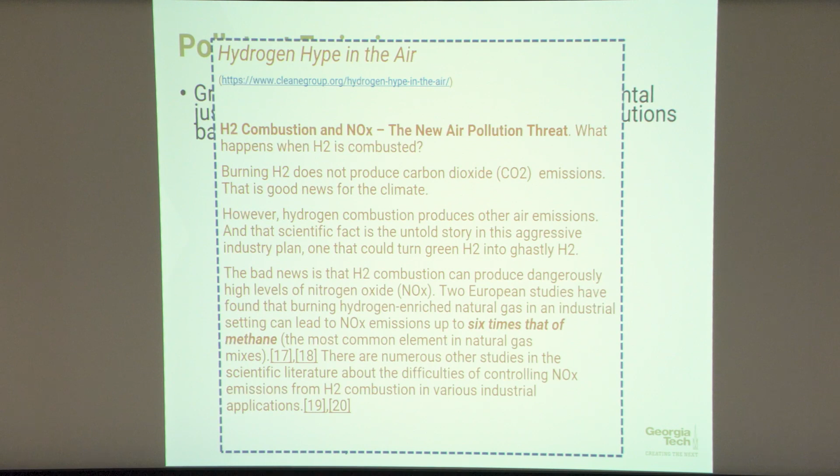There are numerous other studies, so you can see the point. So it's a valid concern, but it's total garbage, total garbage.

If you go look at the studies they're referencing, somebody basically ran a non-premixed flame and added hydrogen. Hydrogen burns hotter, stoichiometric hydrogen burns hotter than methane, right? If you run a non-premixed flame, you will make more NOx. Well, we wouldn't do that, right? We're going to run premixed because we're in a NOx-controlled world.

So let me see if I have it here. I don't. That little press release I showed you is several years old. I think there's a lot of data coming out now where people are starting to report NOx numbers from premixed hydrogen systems, and the NOx numbers are actually lower than natural gas.

In fact, it just showed up in the preprint — we just published a paper on premixed hydrogen natural gas blends, showing that NOx emissions come down when you use hydrogen, it doesn't go up. But this just shows you why you've got to keep your head up, even as you're doing research. It's an interesting problem that comes out of this world we're moving into.

And obviously premixed hydrogen combustion is a challenge because of flashback. That's why those first studies they're quoting weren't running premix — they just wanted to try something real quick and easy. I think, generally speaking, NOx and high efficiency technologies with low NOx go back to what I talked about earlier, and then particulate matter.

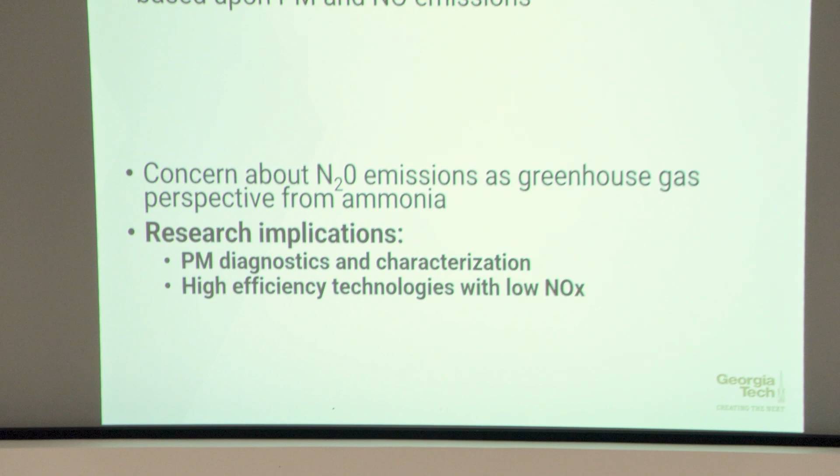So I'm really glad that, as part of the summer school, Dr. Michelson talked to you about PM, particulate matter, because this is going to become more and more important.

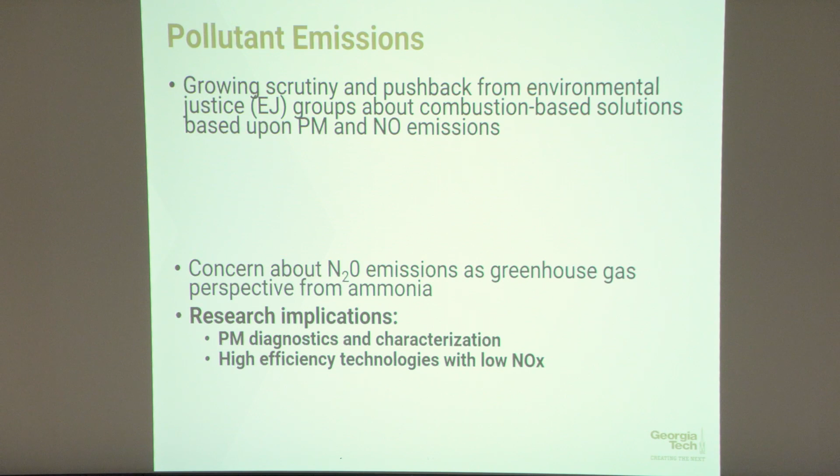If you're watching the news, there's lots of interest today around natural gas-fired cook stoves and air quality in homes — just go Google it, very recent, last month. Lots of big studies made all the major press stories about, hey, do we even want this stuff? Again, if it can get us to zero CO2, but we don't want our kids to have asthma, right? So how do we deal with PM?

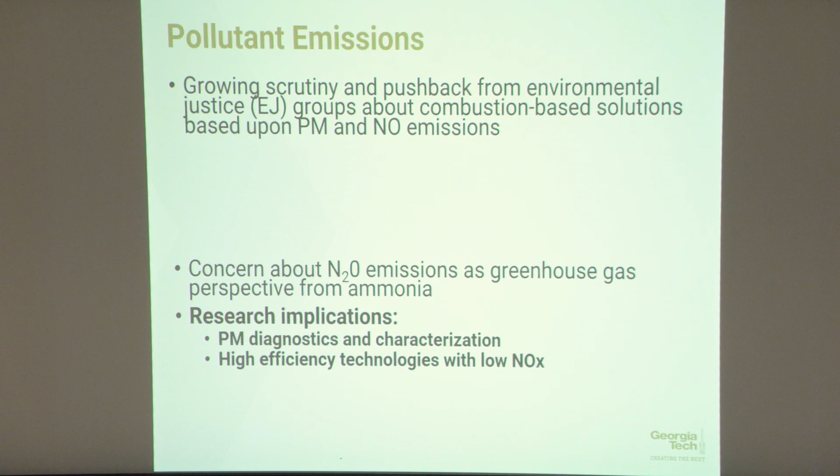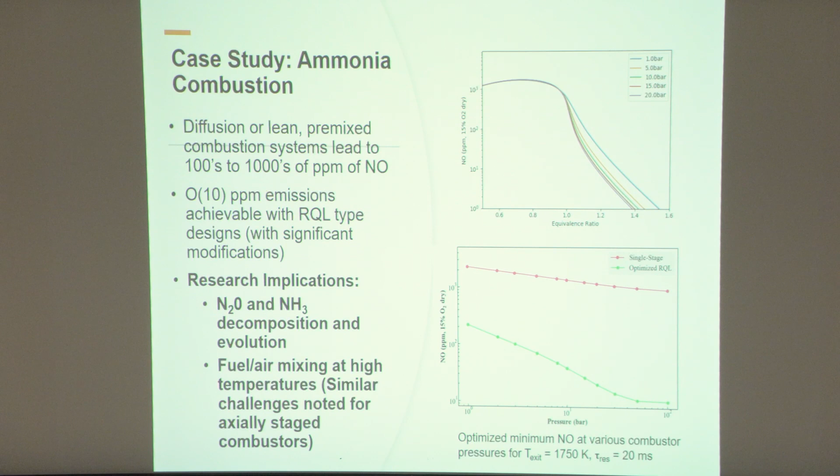Growing scrutiny around this — not to say it hasn't always been important, but I'd say it's increasingly important. I'm running way over time, but I think ammonia combustion is also really interesting — how do you do low NOx with ammonia? But I'm just going to jump past that.

And lastly, fuel flexibility. We're going to spend a lot of time talking about fuel flexibility here, because all these operability issues I talked about — blowoff, combustion instabilities, flashback, autoignition — are very sensitive to fuel. So balancing those with other combustion needs is going to be the issue.

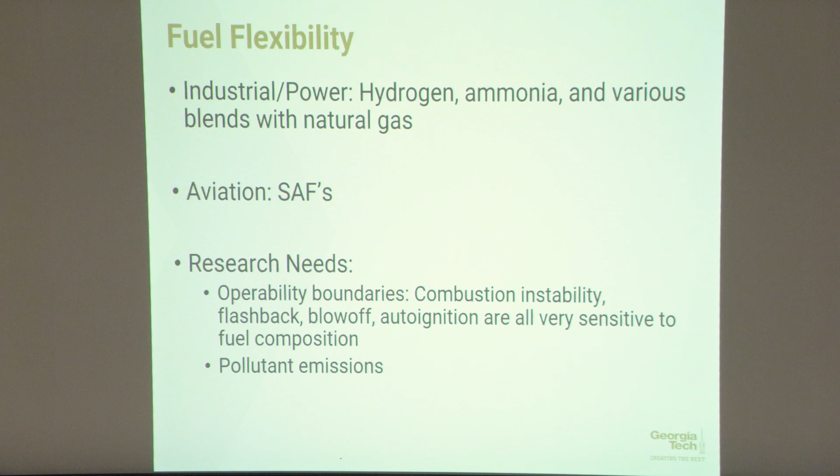So just to summarize my point on where the world is heading, Tim Lieuwen's prognostication is a reminder that fuels provide not one value but three values to the energy system. Those values are going to become increasingly differentiated, and combustion technologies will be entering this much broader milieu of potential sources of energy, users of energy, carriers of energy, and so forth. My take on the drivers that will control where combustion fits is really around operational flexibility, emissions, efficiency, and fuel flexibility.